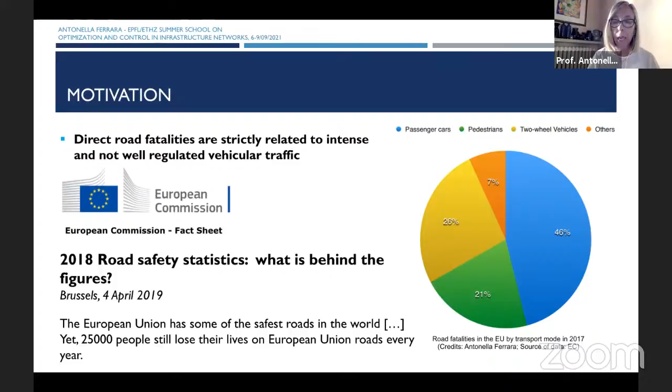Another aspect related to traffic is that congestion has an impact not only on pollution and climate, but a very strong impact on road fatalities. Consider that roads in the European Union are among the safer in the world, but in spite of that, every year we have 25,000 people losing their lives on the roads. This is the so-called direct fatalities, but we also have indirect fatalities related to air pollution. Looking at this picture from the World Health Organization webpage, you can see that transportation systems are considered the second source of fatalities in our industrialized world.

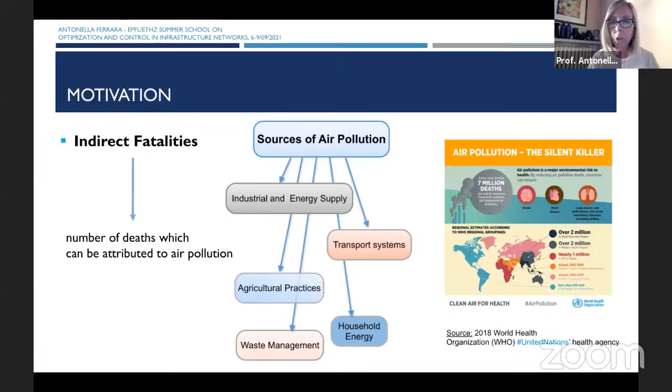So we have to do something. We have a mission, especially considering that people like me, as a control expert, have the possibility of making an action, having some impact on the system. So we have this mission to try to solve or alleviate the problems I've just mentioned.

Traffic control is a particular control system which can be recast into this classical scheme, the so-called closed loop control system. We have the road traffic system, seen as the process to control, upon which some exogenous signals have an impact. These exogenous signals are external inputs which are not manipulable. Then on the system we have actuators, devices which allow us to exert an action on the system, and sensors, devices which allow us to measure some quantities.

In case the quantity we're able to measure is, for instance, the density of traffic, we can assume some reference density - the density which, according to some prescription, is the prescribed density for any particular point of the traffic system. Then we can compute an error, and design a controller such that using the error as input, we can exert the correct action on the system.

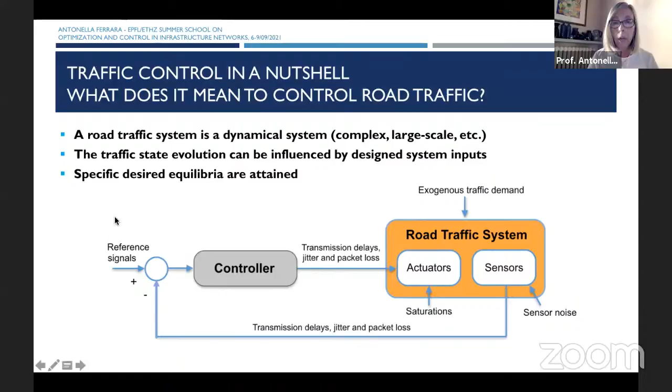The objectives typically used in traffic control may be several - I'll mention some that I'll use during the talk. For instance, the total time spent by vehicles in the road traffic networks, the maximization of the total traveled distance by vehicles in the network. Another possibility is to maximize the so-called capacity exploitation of the system, for instance selecting specific set points in order to make the system be exploited at the maximum of its possibility. As I said before, we started by making some comments about sustainability.

And of course, you can also have some control objectives which are strictly related to sustainability. Sustainability is related to emissions, safety, noise pollution. So we may want to reduce the noise. There's also the aspect related to energy efficiency, and environmental risk mitigation, for example, when dangerous goods are transported via freight.

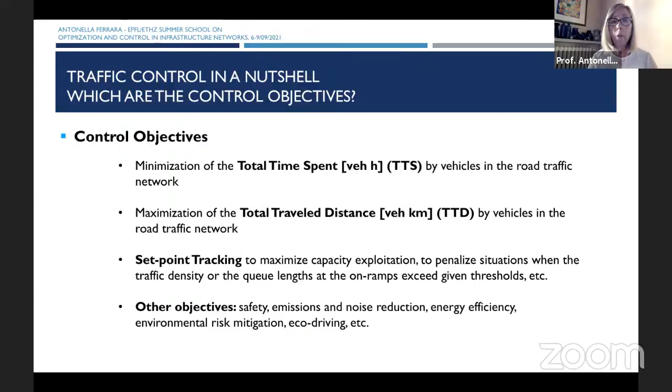So we can also decide to formulate a control problem, an optimization-based control problem in particular, in order to minimize the environmental risk, and so on. These are just examples. The idea, which is the basis of the second part of the talk, is...

related to the possible future scenarios we may have in traffic systems. I'm particularly thinking of freeway traffic systems, but what I'm going to tell you may be valid with some slight variations also for urban scenarios. So what is becoming more and more different, thinking of future years...

is that instead of having in our traffic system only human-driven vehicles or low automation, traditional vehicles, we will have more and more the presence of highly automated vehicles—not necessarily autonomous vehicles, but this is why I prefer to use the word automated. If the vehicles are autonomous, they can be even more efficient in terms of control or controllability of the traffic system.

But even if they are only highly automated—and when I think of highly automated, I'm just mentioning vehicles with on-board adaptive cruise control systems, some braking and traction control algorithms—this is something already in the market, already considered feasible, or already produced in some cases.

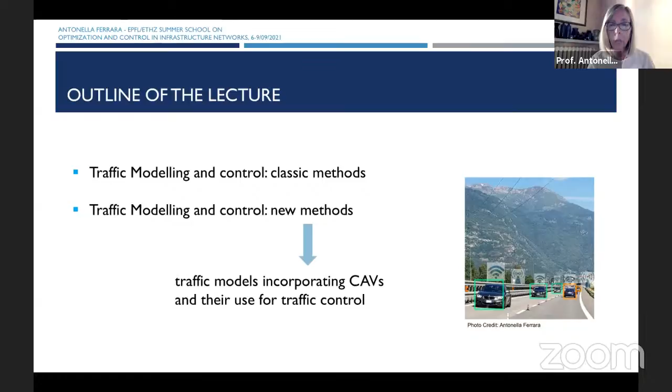Okay, so let's start from the classical methods and say a few words about, in particular, the models to be used first, and then some methods for controlling the system. When we design a control system for traffic systems, we have to follow the same procedure that we are familiar with.

I believe that the majority of you have a certain background in control, but the idea is that a control system, in a classical way to think of this concept, is designed on the basis of a model of the process. So it's the so-called model-based approach, and this is the classical, very classical approach also in traffic control. So there is the need to formulate a model of the system.

Considering traffic systems, the classical models used to describe traffic flow can be of different types. Typically we have microscopic models, mesoscopic models, and macroscopic models.

Microscopic models are models which describe the single vehicle as if it were a kind of agent moving in the network.

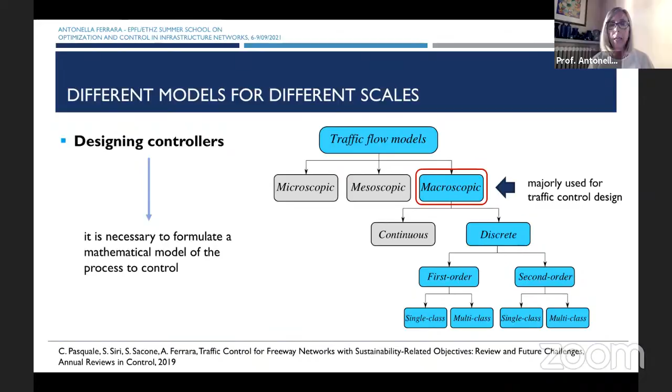And then very often we may find single-class models or multi-class models. When I say multi-class, I mean models in which different types of vehicles - like for instance cars and trucks, or kinds of vehicles like bikes or buses - are distinguished from the classical cars.

Just to give you a very brief review of the classical models, I'll mention a model that I believe some of my colleagues have already mentioned, which is the well-known Lighthill, Whitham, and Richards model.

This model, as you see in the slide, is described by a partial differential equation based on the density. Rho is the density of the traffic flow, t is time, x is space - so it's a kind of conservation equation, to call it by its name. It is based on this function f, the so-called traffic fundamental diagram, a diagram describing the theoretical relationship between the flow and density of the macroscopic traffic under steady state conditions.

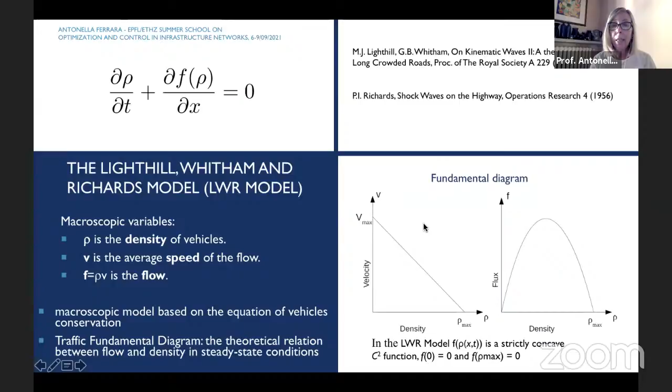This model was introduced in the 1950s, so we are talking about a very classical, very ancient model, at least from the perspective of young students. This model was anyway the basis upon which other models have been developed.

For instance, the very well-known cell transmission model, the so-called CTM, is a kind of discretization of the model we've seen before. The discretization is performed both in space - subdividing the freeway into a collection of cells - and in time.

For any cell into which you subdivide the freeway stretch you're dealing with, we have a first order equation describing the evolution of density in the cell. Rho sub i is the density inside cell number i, and here you see we have a flow entering the cell and a flow exiting.

If you look at the flow entering a cell, you can determine this flow simply on the basis of a very classical demand and supply mechanism - a mechanism which is very easy to explain.

You have a certain volume of vehicles which ask to enter cell number i, but cell number i already has a certain number of vehicles inside, characterized by a density. The capability of cell i to accommodate entering vehicles also has to be considered - the supply is exactly this capability of accepting new traffic entering the cell.

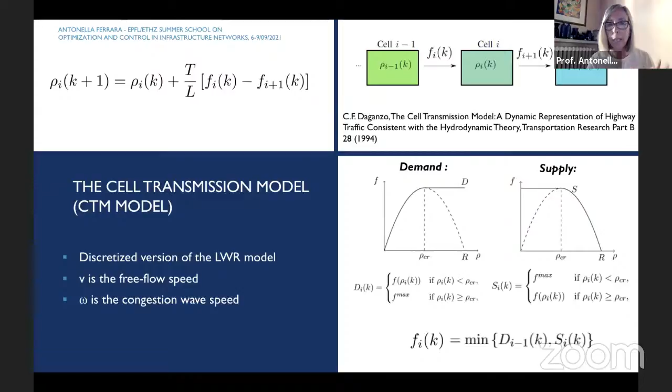The CTM, the cell transmission model, was originally described for a single stretch - a kind of tube, a linear piece of road.

But then there was another paper, still written by the author of the CTM, Daganzo, in which new cells were introduced - the so-called merge and diverge cells - which are the building blocks on which you can build an entire traffic network, modeling something close to a real-world traffic system. Of course it's a model, so it's an approximation, but it can be a good model of a traffic system.

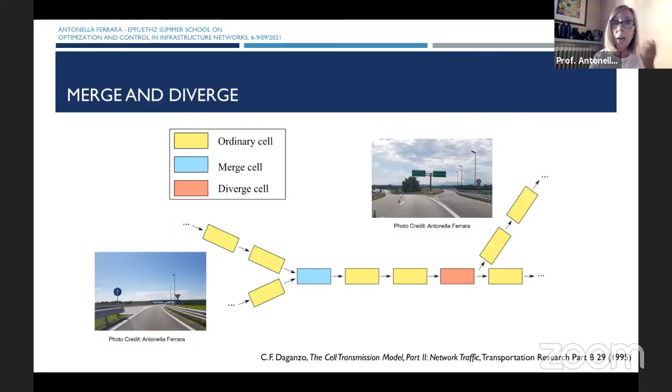Of course, there are slight differences, and one of the issues one has to consider when using the CTM is the difficulty, or the impossibility, of this model to be very precise in describing an effect present in real traffic: the capacity drop effect. This occurs when you have a congested cell, a bottleneck. If you look at the flow exiting that cell, the so-called discharge flow, it is typically lower than expected, lower than the capacity of the bottleneck. This flow reduction, observable in real systems, is typically around 5 up to 20%, so it's not negligible, to be precise.

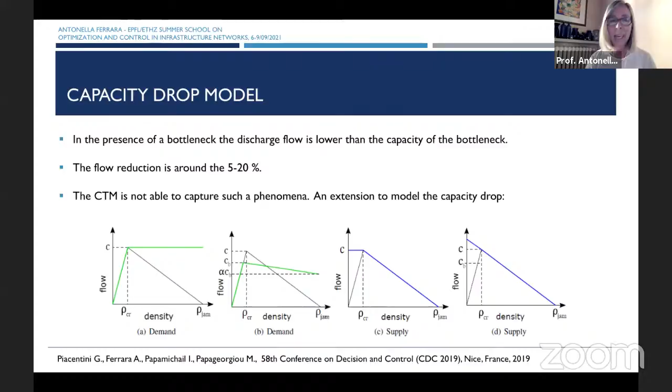Unfortunately, the classical CTM model cannot describe this effect. There are many variations to the basic CTM model proposed in order to accommodate or describe the capacity drop effect. One of these is presented in the paper indicated at the bottom of this slide, co-authored with Professor Papageorgiou, and also with colleagues of Professor Papageorgiou, the well-known name in traffic control Ioannis Papamichail, and my former PhD student Giulia Piacentini. This is something I will use again in the second part of the lecture, which is why I mentioned this paper.

Another model which can be useful, and rather convenient in terms of control design for its simplicity, is a model I proposed together with Professor Canudas de Wit, called the variable length cell transmission model. It's very simple in the sense that it is based on three differential equations only for a certain freeway stretch, describing the density in the two parts into which the freeway stretch considered is divided - for instance, we assume there is a congested part and a free, non-congested part.

So we have the density describing those two parts, and then we have the evolution of the length of the queue, which represents the shock wave, if you prefer a more technical term - the evolution of the congested part of the cell. If you think of a traffic network, you can identify portions with some free part and some congested part, and that portion becomes a stretch to be modeled in this way.

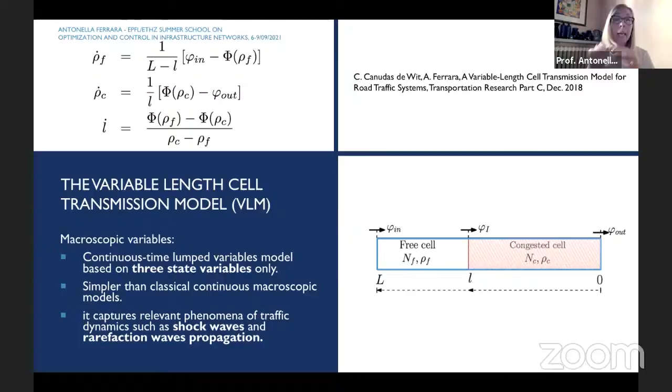Of course, there are other macroscopic models you may consider if interested in traffic control. There is the well-known asymmetric cell transmission model, proposed by Professor Horowitz and co-workers. There are many different multi-class versions of the CTM. And then there is the MetaNet model, which Professor Papageorgiou has already introduced, a second order model capable of describing the evolution of the density in any cell into which you may subdivide a traffic system, but also the velocity of traffic - and this incorporates the possibility of correctly describing the capacity drop effect I mentioned before.

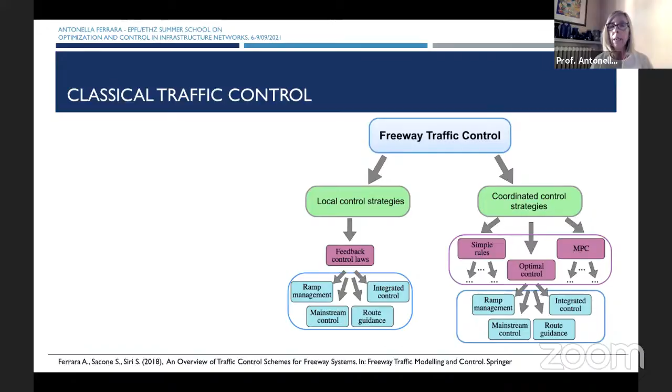Now let's say something about classical control. I focus, as I mentioned before, on freeway traffic control because it's something I know better, to be honest. This classical freeway traffic control can be subdivided into two parts: local strategies and coordinated control strategies. Local strategies typically consider a very local, small portion of the network, in which you have some kind of actuation - I'll say immediately what I mean by actuation in a classical traffic control system. In coordinated control strategy, you may have cooperation, combination, or coordination among different local control systems.

I'll mention the traffic control systems and actuation mechanisms for implementing this kind of control. The more classical one is the so-called ramp metering, where you have traffic lights on the on-ramps of the traffic system, so you can meter and control the entrance of vehicles into the system. Another very classical traffic control methodology is the use of variable speed limits.

So you have velocity limits on any lane typically of the traffic systems, and you may change the signals in order to slow down or let the traffic move at a certain speed, and this can create some regularization of the traffic itself. And finally, you may have dynamic routing, which means that, for instance, you can make some category of vehicles, for instance trucks, select an alternative direction, making the main traffic system, the mainstream you are controlling, less congested.

These kinds of techniques are typically also used in combination, in a kind of integrated way, in coordinated control strategies, which may be, as is traditionally true, based on optimization. And very often they also include some prediction capability, typically designing the control strategies using model predictive control.

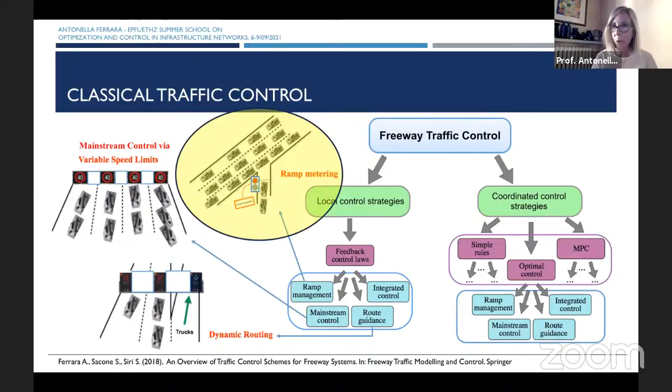I want to give you some examples of these methodologies, and I will focus in particular on ramp metering. Also considering the topic of this summer school, I wanted to give an emphasis on optimization-based technique, so I start immediately considering model predictive control.

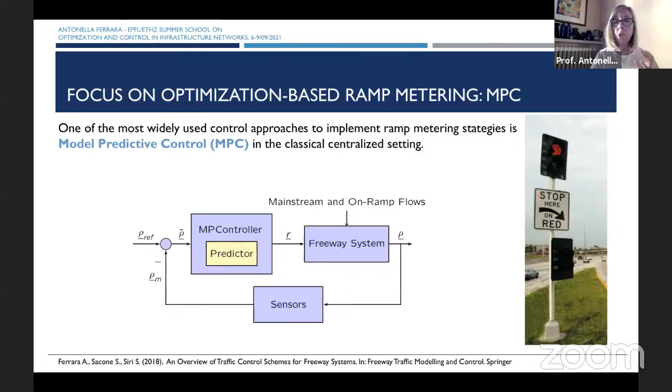Of course, you can immediately understand that the complexity of the model we decide to use as a predictor will have an impact also on the computation time and on the accuracy of the computation, and also on the decision, for instance, to implement the MPC in a centralized way or in a decentralized or distributed way.

So let me say that in general, when we use an MPC or optimization-based ramp metering controlling a traffic system, we have some advantages considering the control objectives that I've already mentioned before: the minimization of the total time spent in the system, the maximization of the total travel distance, the tracking of set point values, or any other kind of objectives, such as those related to sustainability, as we mentioned before. And you have the advantage of having some prediction incorporated in the system.

You may have the advantage of having some optimality, or let's say suboptimality, but with acceptable difference with respect to the optimal solution. You may have compliance with the constraints, which comes directly from using MPC. But the drawbacks in a real system are that typically, in terms of computational load, the MPC algorithms are demanding, and they are difficult to apply in a real system, especially if it's large scale.

And so if you want to implement it in a centralized way and you have a complex and large traffic network, you may encounter some difficulties.

So in particular, if you want to have an idea of what I did in the past with my colleagues to tackle this problem—the computational complexity and the difficulties in implementing classical MPC approaches for traffic control—you can see what is presented in this slide, in which I've tried to provide a schematic of what can be done to make MPC-based ramp metering control schemes actually usable in a real system.

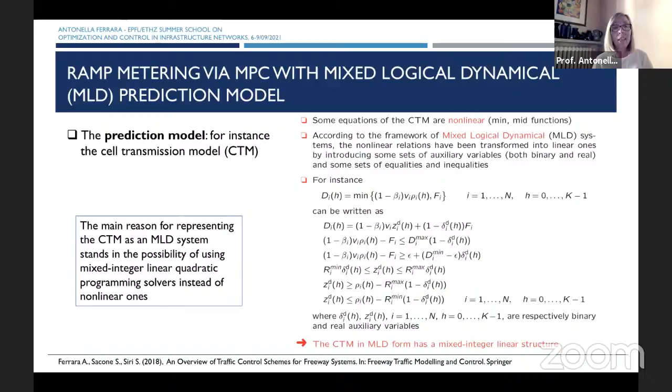This, of course, is beneficial in the sense that when you solve the optimization problem, you can use mixed integer linear or quadratic programming solvers, for instance, a solver which is easier to use, and the problem itself becomes in some sense easier to solve.

I give you an idea of the problem. So you may have, let's say, the initial condition for the density and the length of the queues on the on-ramps. You may have the demand and the supply as known quantities, and what you have to determine is the so-called metering flow, so the flow exiting the on-ramps and being allowed to enter a certain cell. And to do this, what is solved is a classical finite horizon optimal control problem.

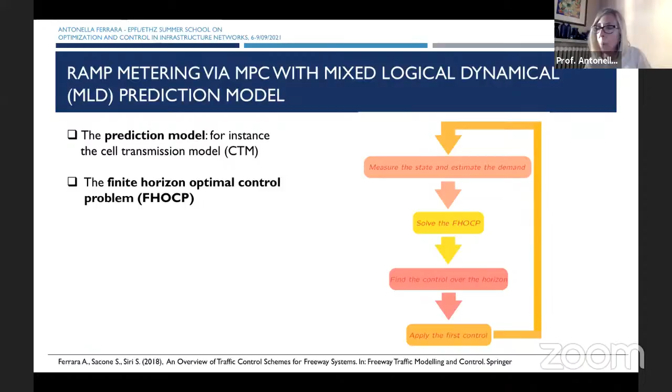I show you the schematic, and if you agree, we can stop here for a moment.

Is it correct? Kimia, it's almost time to stop, to make a break, or? Well, you can decide as you wish. We can either have a quick break right now, or if you like, you can continue. As you prefer. If the students need a break, I stop. Otherwise, for me, I don't need a break, so I can also go on if you prefer, and maybe finish a bit earlier. Is it fine? Yeah, sure, of course. Okay, very good, very good. So if they agree, I hope they're not too... So for me, the break is not needed actually.

Okay, so as I said, the solution of the problem is based on the classical approach that probably you know very well. So we measure the state and estimate the demand. We solve the finite horizon optimal control problem, find the control over the horizon that we have decided to use, apply the first component of the control sequence that we determine, and go on again and repeat the procedure.

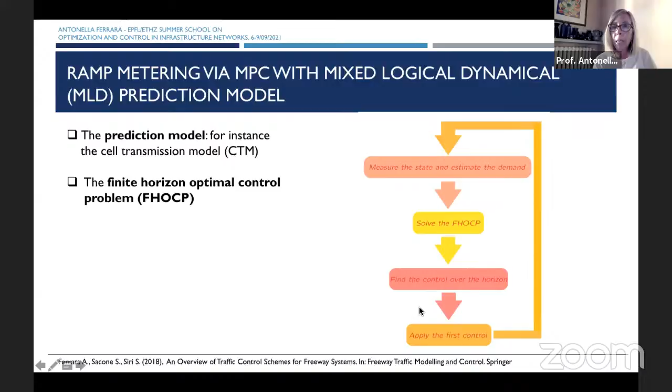The problem, of course, is different depending on the kind of cost function we decide to use. I'll show you an example of what happens if we use a mixed logical dynamical predictor to solve one of the classical control problems for a traffic system. For instance, if we use the so-called total time spent, and we want to minimize the total time spent by vehicles in the traffic system, the cost function may depend on the density and on the length of the queues on the on-ramps. The optimization problem we have to solve, in a finite horizon fashion, is a mixed integer linear problem.

If instead we want to minimize the so-called quadratic deviation of the state variables - again, the density and the length of the queues on the on-ramps - with respect to some pre-specified thresholds or set points, the problem becomes mixed integer quadratic, as I said before. And of course, there are other possibilities.

In some of my papers you may find the cost function I've reported here. In this case, the idea was to minimize the cases in which the state variable exceeds given thresholds, which can be set considering the particular traffic system you're dealing with. Another case is when you want to minimize the number of cells which are congested, so in some sense reduce the diffusion of congestion in the traffic system.

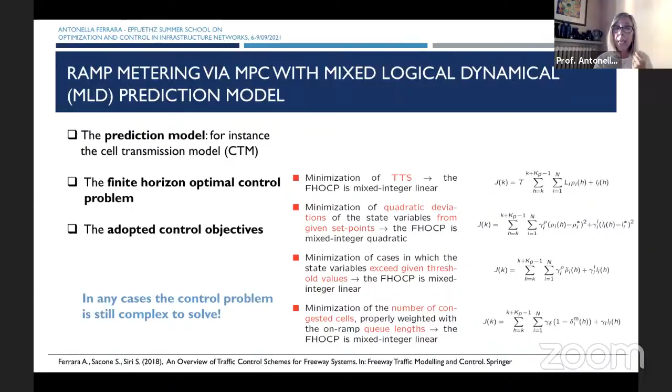In both of these cases, the problem to solve is mixed integer linear. So reformulating the model in mixed logical dynamical form is a way to reduce the complexity of the optimization problem to solve. But in any case, the problem is still complex.

So the other possibility that I mentioned in the list I showed before is to control the traffic system only when it is actually needed. This means adopting a kind of philosophy called the event-triggered control approach. The schematic is the one reported in the slide.

We again consider having the traffic system, we measure the state - in case of the CTM, this can be the density in any cell and the length of the queues on the on-ramps. We estimate the exogenous signal, the demand, which, as I said before, is something unknown. We solve the optimization problem, find the control over the horizon we decided to adopt for the optimization, apply the control action - the first component of the sequence - and then check the triggering rule.

The triggering rule is something which may tell us if some change has occurred in the traffic system dynamics, in the traffic system evolution. If, checking the density and the length of the queues on the on-ramps, we see there is no major difference with respect to the previous time instant in which the optimization problem was solved, we can keep on using the same control sequence we computed before. So there is no need to solve the optimization problem again. And this is exactly the idea.

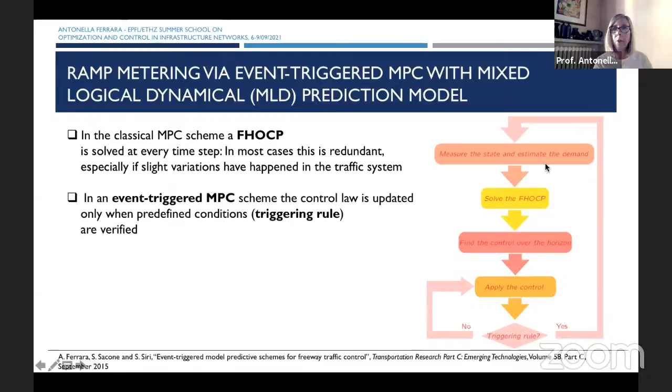Instead, if something new happens in the system - for instance, an abrupt change of the demand, which means the density in the system, not immediately but rather quickly, undergoes a variation - well, you have to re-optimize. You have to solve the optimization problem again, and in this case you go back and repeat the procedure. So this is the idea.

The triggering rule is more or less what I said before - I just reported an example of a triggering rule. If you think of the MLD, the mixed logical dynamical setting of the model, this variable, which I didn't mention before, is one of the logic variables we use to indicate whether the system is congested or not. So if the system is congested, typically this variable becomes 1, otherwise it's 0.

So what we do, for instance, to propose a triggering rule or to implement an event-triggered control approach, we check this logic variable. So if the mode of the system, congested or not, is not different from the one we can retrieve from the prediction model, and if the density we can measure is not different from the one we can retrieve from the prediction model, considering the measurement at the previous triggering instance, and if the length on the on-ramps is not much different from the predicted length, considering the measurement transmitted at the previous triggering event, then we can keep on using the already computed control action.

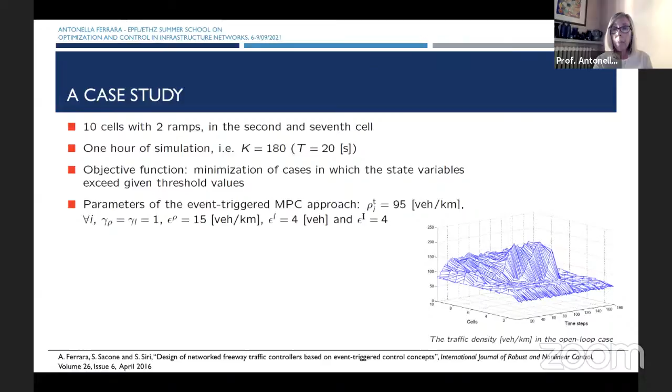Well, if you look at the result, you can see the improvement of the total time spent is 7%. You may say this is not a very huge increment, but probably you have already heard in other lectures—I believe Professor Papageorgiou already mentioned this—that typically in traffic control the improvement you may obtain is not so high. And when you find papers showing improvements in total time spent like 68%, 70%, 50%, be careful. It's strange. It's very difficult to manage with ramp metering control to obtain such a significant increment.

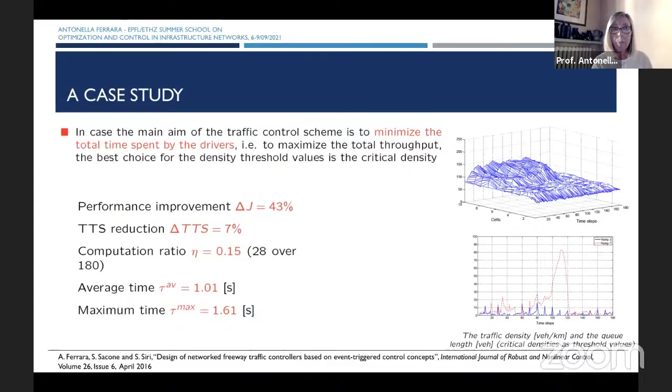Well, of course, using event-triggered control—this is something I have to tell you to be complete in my description—event-triggered MPC control implies a number of issues that need to be tackled from the theoretical point of view. The optimization problem is solved whenever the triggering rule is verified, that is, when the triggering rule tells us we have to resolve the optimization problem. And of course this means we are solving the MPC problem in an asynchronous way, which means very particular convergence and feasibility aspects need to be faced.

The second aspect I want to mention is stability results. When you work with traffic control systems, it's always an issue to consider which stability properties you may prove, and this is not so easy to discuss in general. If you look at my papers, very often we talk about input-to-state stability, input-to-state practical stability, input-to-state regional stability. So let me say that any time you deal with this kind of system, you have to be rather careful in claiming a very utopian result, like global asymptotic uniform stability. I'm always very surprised when I see something like that.

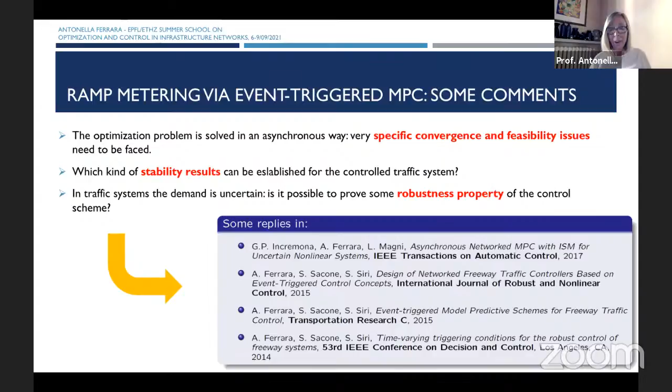Okay, I'll go quickly now because I want to move to the second part of the lecture. As I said, I still have to tell you a few words about the other approach that can be used. To summarize briefly, if you remember, I said that to make an optimization-based control approach applicable in a real traffic system, you have different possibilities. You may reformulate the model so that the optimization problem becomes simpler.

The second way is to control only when it is actually needed. So observe the traffic system and identify the time instant when you need to solve the optimization problem—the event-triggered approach is a good solution for this.

The other possibility is to control the system only where it is actually needed. This can be implemented by subdividing the network. I've just reported a stretch, but this can be extended to a more complex case in which you have a network with intersections, merge and diverge elements, and you subdivide the network into clusters.

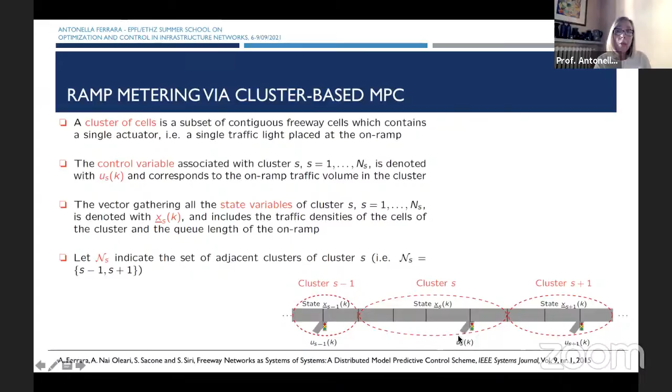What we did in the past was to consider a portion of the freeway system and a collection of contiguous clusters. In this way we created a kind of state vector for each cluster. The idea used to identify and create a cluster is that within the cluster itself there is a single actuator. In the case of ramp metering, a single actuator means a single on-ramp.

If you look at the literature, there are different solutions for cluster-based traffic control. One possibility is to use decentralized MPC: for each cluster you solve an optimization-based control problem as if that cluster were an isolated system, with no connection to the other clusters present in the traffic system. Another possibility is to use distributed control.

There are many different solutions you may find in the literature. I can't claim this is the best, but as an example, a possible solution is the one presented in the paper indicated at the bottom of the slide. In this paper we presented two different algorithms. The first, algorithm one, is called the partially connected, non-iterative independent algorithm.

In this algorithm, the local controller of each cluster solves its own optimization problem, minimizing a local cost function. This cost function depends on the state of the cells in the cluster and on the input signal used to control the flow of vehicles exiting the on-ramps and entering the mainstream. This optimization problem produces the control sequence for the cluster itself.

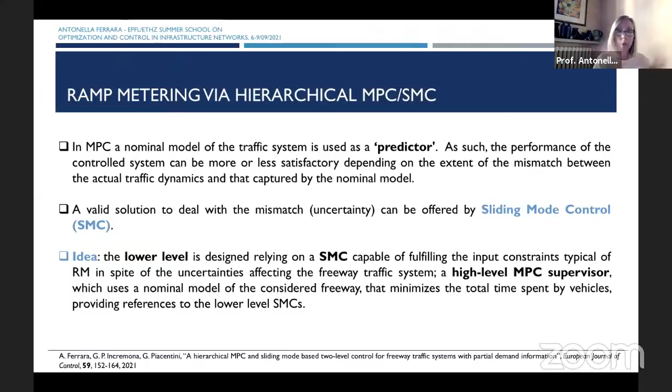And now I can conclude completely this first part, showing you the scheme that I mentioned before.

So if you want to incorporate also a robust control algorithm together with MPC, a possibility is the one that, for instance, we have presented in the paper that you see here in the slide, at the bottom, in which we have decided to use sliding mode control at the level of the local loop for any cell of the system, and an MPC as a kind of high-level controller.

In this case, I just want to add some comments to the scheme, and then you may find the details in the paper. The MPC control is a supervisor in the sense that it is based on a prediction model of this traffic system, one of the models that we have mentioned before.

It can be the CTM, it can be the MetaNet. In this paper, we have used the MetaNet model in particular. And what is done is to produce a reference for the state of any cell of the system.

A sliding variable is computed locally at the level of the local controller of the cell, measuring the state of the cell itself. Let's look at cell number i for generality, measuring the state of any cell and comparing it with the reference state provided by the high-level controller.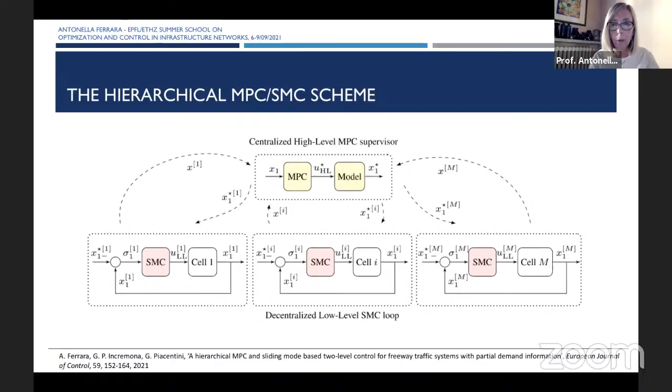This is all I wanted to tell on the first part. Now let me just move to the second part. I'll go very quickly because I added some detail, but I think it's better to skip them, and you can find them in the paper. Let's move to the more modern control approaches, as I call them.

As I said, the introduction of connected and automated vehicles in traffic systems can be regarded as a kind of paradigm shift, in the sense that now, instead of having the need of using infrastructure-based control, think of what we have seen before. A ramp metering control uses a traffic light, which is an infrastructure-based actuator, to perform an action on the system.

Now, the idea is, instead of using infrastructure-based devices and approaches to control the traffic system, to use the vehicles, or some vehicles, which are included in the traffic system itself. In particular, the idea is to use the so-called connected and automated vehicles, the CAVs that I mentioned before, to create a kind of artificial moving bottlenecks.

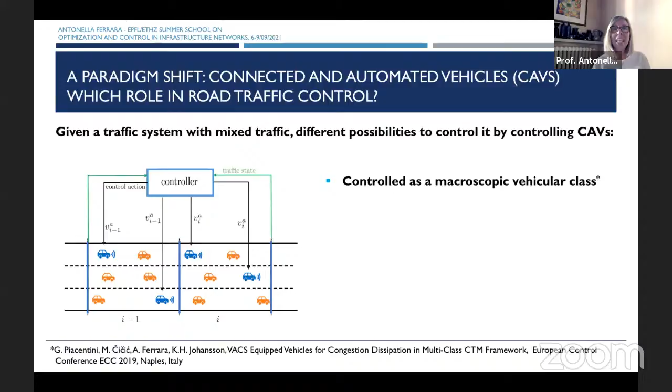If we want to use connected vehicles as actuators, one possibility is to control the connected and automated vehicles present in the traffic system as if they were a macroscopic vehicular class. This is done in a paper co-authored with Professor Karl Henrik Johansson, whom you saw this morning.

The idea is to use a model where we subdivide the traffic system into cells. For any cell, we have a description of the density of one class of vehicles, for instance the classical human-driven vehicles, and another class, the density of connected and automated vehicles. With both classes modeled, we need to account for the interference, or the way the two classes behave together. Since we assume the possibility to control the velocity of connected and automated vehicles, we can create a regularizing effect on the overall traffic system.

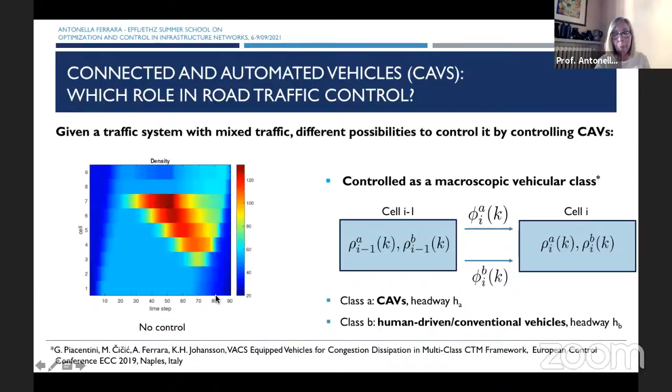What happens in this picture is that we have congestion starting from this cell at a certain time instant, then propagating backwards into the upstream cells in space, and forward in time. If we model the connected and automated vehicles as a particular vehicle class, we get different control effects depending on the penetration rate—the fraction of connected and automated vehicles over the total vehicles present. As shown in the paper, increasing the penetration rate up to a certain extent produces effects that become roughly constant after a certain level, but the effect is good: the congestion tends to be alleviated and the density becomes lower compared to the open loop case.

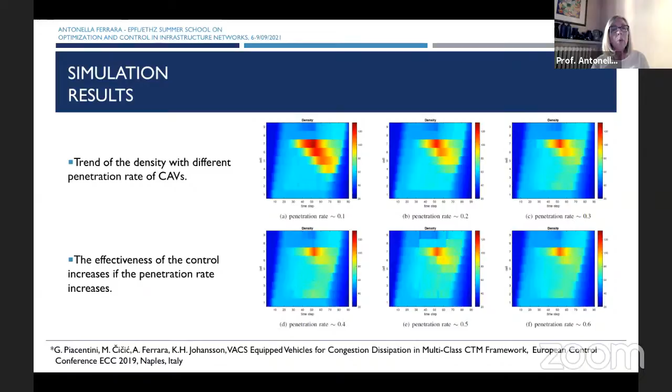So one possibility is controlling connected and automated vehicles as a single class, with human-driven vehicles as another class. Another possibility is to control connected and automated vehicles individually, assuming a controller for any vehicle. This is easy to implement technologically, but the control is not easy to design, since we must balance the selfish behavior typically caused by this setting against the social optimum we want to reach.

An idea is to use a game theory-based approach in which vehicles are individual agents playing a game. There's no inherent cooperation, but we may want to realize a kind of cooperative game even though the setting is typically non-cooperative. This cooperation can be enforced using the connectivity we have—the possibility of exchanging messages among the vehicles, which are our actuators.

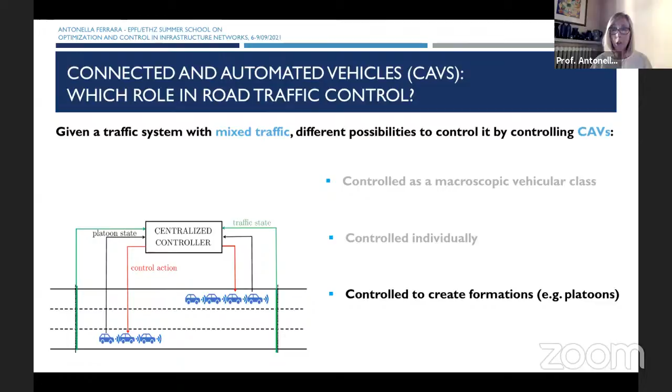Another possibility is to create formations such as platoons. You may decide to control the platoons in a centralized way, assuming a single centralized controller with information on the entire network and all platoons moving on it—this can be computationally demanding and also demanding in terms of measurement transmissions. Another possibility is to use local controllers for any platoon. Again, the game theory-based approach can be transferred to this case, and some form of cooperation exploiting the vehicles' communication capability must be enforced.

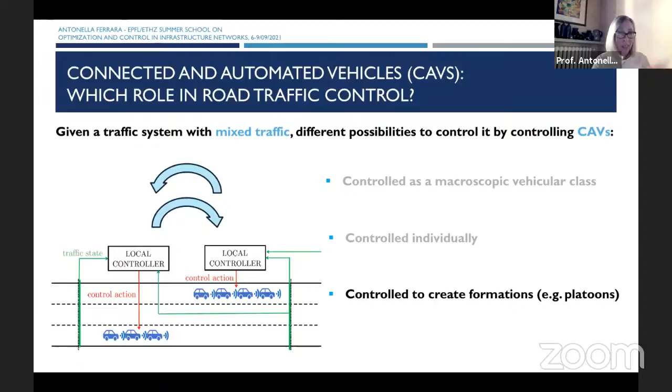And this is exactly what the arrows indicate, what I just said. Well, a comment on the model.

Depending on the approach you decide to adopt, remember what I said before: CAVs controlled as a macroscopic vehicular class, CAVs controlled individually, or CAVs controlled to create platoons or other formations. Depending on the approach one decides to use, you need to formulate a different model. If you decide to control the vehicles as a macroscopic vehicular class, varying the headways of this class or the velocities of these vehicles as a class, not individually, you need to use a single scale model. That is a model in which both the class of human-driven vehicles and the class of connected and automated vehicles are represented at a macroscopic level.

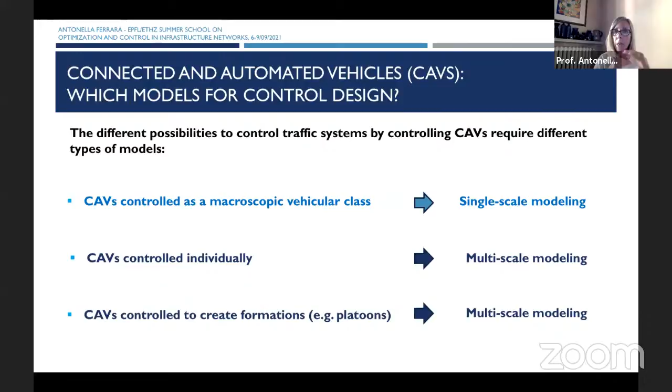But if you decide on the other two approaches, to control the connected and automated vehicles individually, or to create formations, the modeling approach must be completely different. It must be multi-scale, because at the same time you have to describe the evolution of the connected and automated vehicles, which are individual vehicles, kind of single agents. They are microscopic vehicles immersed in a macroscopic flow. So you have two scales at the same time, and they coexist, and must be described mathematically at the same time, incorporated in the same model.

This picture wants to describe, in a pictorial way, what I've just told you. So the idea is that if we want to design a control system for a traffic system using this new vision, controlling the system using connected and automated vehicles which are themselves part of the system, we need a completely different modeling approach.

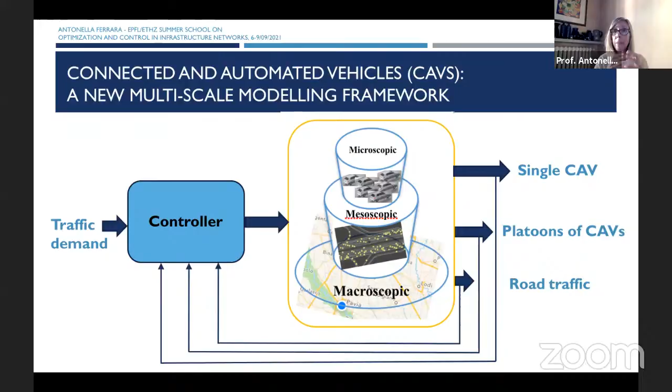We need a model which includes at the same time, in the same formulation, the macroscopic traffic to describe the entire road traffic system. We need a microscopic level to describe the single connected and automated vehicle. And if we want to enforce the creation of platoons or formations, we also need a mesoscopic level where car-following effects are visible and described.

And well, this is the novelty in some sense. What I'm going to tell you in the last part of the lecture is something about what we have done using these different approaches, and in particular using multi-scale models.

I start with the CTM, the cell transmission model that we already considered before, where the traffic system is subdivided into cells. Now the difference compared to the first part of the lecture is that we assume, apart from the macroscopic traffic, the presence of some connected and automated vehicles. They may be individual or they may be platoons. I'll assume they are platoons, but the formulation remains similar—you only need to consider different effects for a single vehicle versus a formation of vehicles, since there is a different reduction of capacity performed in the two situations.

So a possibility is to incorporate the presence of platoons, very often called moving bottlenecks, in the traffic system. In the CTM, for any cell we have a first order equation describing the density. The presence of platoons can be described by introducing the variable o with index j, which describes the so-called occupancy of the platoon, with the index indicating the platoon number—1, 2, 3, up to a certain number, capital J. And this delta is a variable which indicates the presence of the platoon in a cell.

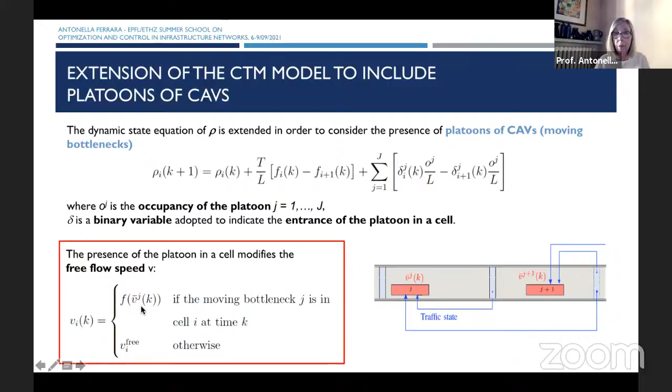When we have this moving bottleneck, the classical free velocity of the macroscopic traffic may be reduced, in the sense that the platoon exerts an action, as we have said, it reduces the capacity of the cell itself. If you look at this picture, you can imagine having 2 or 3 lanes, and one lane becomes partially occupied by the platoon itself. So typically the velocity in case of presence of the platoon in a certain cell is a function of the velocity of the platoon itself. This is a way to describe the platoon.

This is the way we adopted in the paper I mentioned before. For instance, in that case, we designed a kind of centralized control in which we use as a control variable the speed of the platoons present in the traffic system. So what we do in practice is solve an optimization problem in which we find the optimal control sequence, and in particular the control variable is the speed of the platoons in the traffic system. The optimal velocities that any platoon has to maintain is computed by solving an MPC control problem, in which we minimize the so-called total travel time, as you have seen before.

We also minimize the displacement of the difference between the density at the bottleneck location with respect to the so-called critical density. This is what is normally done, considering that at the critical density, the capacity of the road, the flow that a certain cell can accommodate, is the maximum flow. So it's quite typical to introduce a term to maintain the density as close as possible to the critical density, avoiding entering the congestion phase.

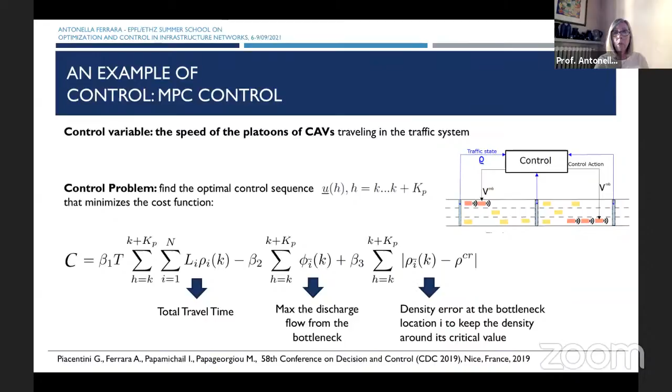Apart from the cost function, which is just an example, you may also use platoons of connected vehicles with different cost functions. But just to give you an idea of the possible results, I used this cost function and propose some simulation results obtained using a stretch of road with 16 cells, each cell having a length of 500 meters.

What is done is we create a kind of temporary physical bottleneck, something which is not moving, differently from the platoons, which are moving bottlenecks. This temporary physical bottleneck is placed in cell number 13 — I mention the number because in the picture it's useful to remember its position. This physical bottleneck has an effect in terms of reduction of capacity, and it remains in the system until a certain simulation time, after which the total capacity is restored and the physical bottleneck is removed.

Just to give a real world example similar to this scenario: when you have an accident, it creates a loss of capacity, and then after a certain time the accident is solved and the total capacity of the infrastructure is restored.

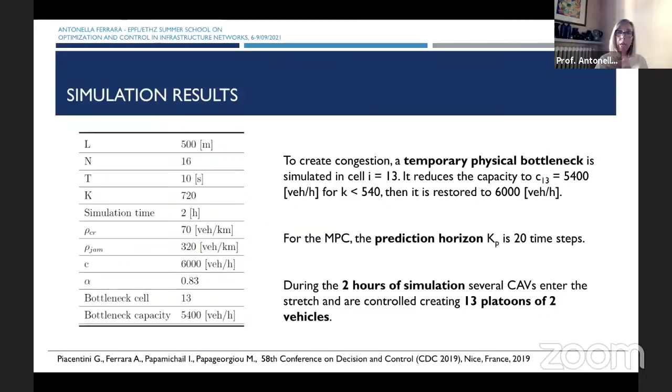What is done in this simulation is to observe 2 hours of simulation, assuming several connected and automated vehicles enter the stretch, creating 13 platoons of 2 vehicles each. This is the result.

Let me show you the result. This is what you obtain with the CTM, simulating the system I just described with the cell transmission model, without the capacity drop modification mentioned in the first part of the lecture. I show you this picture because it will be useful. If you look at it, the CTM without the capacity drop modification is not very realistic. You have a physical bottleneck at cell number 13, and some congestion is created in the cell before it, in cell 12, but this only propagates in time — there's no backward propagation of the shock waves, which is not very realistic.

If I use the CTM with the capacity drop effect, look at the situation — this is more realistic. I have the physical bottleneck, I have the congestion.

It is, of course, majorly present in the cell before the one in which I have the bottleneck, but the congestion propagates also backwards in the upstream cells, as is natural. So this is the realistic situation.

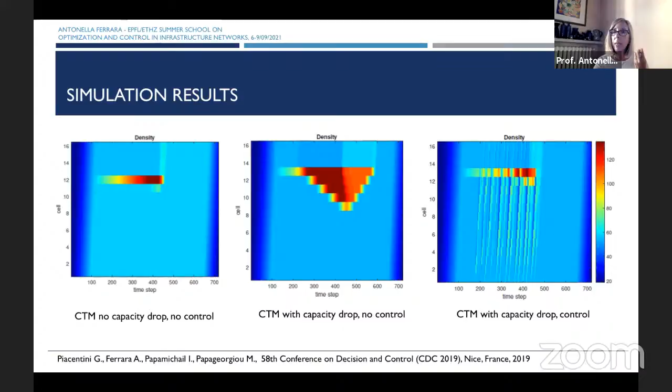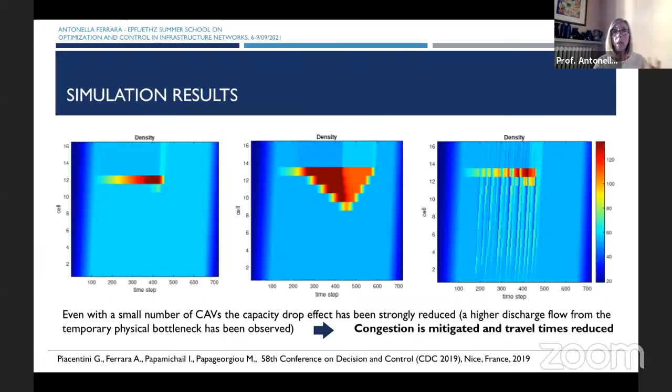This is exactly what we want to obtain with the control: reduce the capacity drop effect, reduce the back propagation of congestion, reduce the shock waves affecting the traffic system. So the idea of using connected and automated vehicles can be effective. Congestion is mitigated, and this has a beneficial effect on travel time reduction and emission reduction. Don't forget that reducing congestion also has a beneficial effect on emissions, fuel consumption, and so on.

Well, this was an example of how to use the CTM with a slight modification to incorporate connected and automated vehicles. Another, more complex way to deal with connected and automated vehicles is coupling a continuous model, a PDE-based model, with a model describing the dynamics of individual cars, the individual connected and automated vehicles, described by ODEs. So what we proposed at the end is a PDE-ODE model for the multi-scale description of the traffic system.

I want to briefly give you an idea of what I mean by this title. This model was actually proposed by my collaborators, two people I like so much to work with, Maria Laura Delle Monache and Paola Goatin. They proposed a model with a PDE model - probably you remember the LWR model we saw at the beginning of my talk, which described macroscopic traffic flow, a classical conservation equation - and then a constraint on the flow describing the moving bottleneck position, which is a kind of constraint on the capacity.

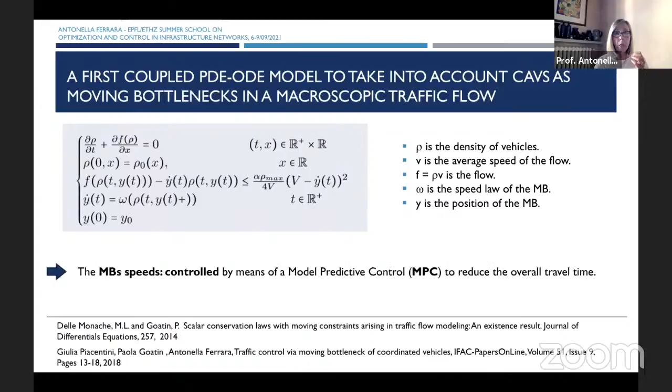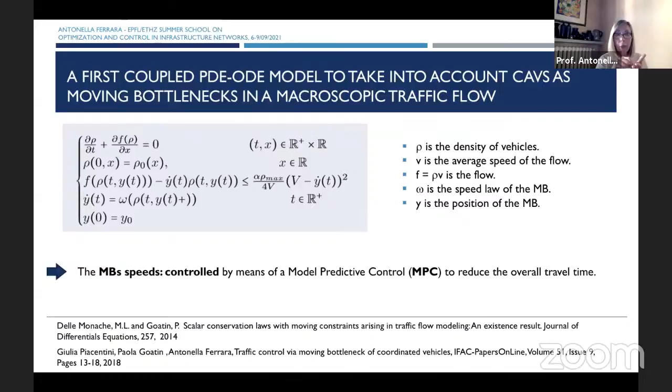This model was already present in the literature when I decided to face the problem using this approach. I found this model and decided to use it, and started to collaborate with Maria Laura and Paola. In particular with Paola, we immediately wrote a paper together solving a control problem using this model. As I noted in the paper referenced here, we solved an MPC problem to reduce the overall travel time of the entire traffic system by varying the velocity of the connected and automated vehicle - acting on the overall system by varying the velocity of the moving bottleneck.

But apart from that, we observed that the model, which was already there, wasn't enough to describe the formation, and in particular the platoons, of connected and automated vehicles. So we decided to work on the model again. Together with Paola Goatin and my former PhD student Giulia Piacentini, we further modified the model to incorporate the presence of platoons. If you think of a platoon moving along a traffic system, a piece of road or stretch of road, the platoon is characterized by the position and velocity of the front end and the position and velocity of the back end.

You can assume to have some low-level control of the platoon itself to have a constant, or let's say what is more constant in time typically, an headway which depends, which is correct considering the velocity of the following vehicle. So the headway between two vehicles typically depends on the velocity of the vehicle which is the follower. Apart from the low-level control, which for this presentation is not so important, we assume that a low-level control to maintain the platoon is present.

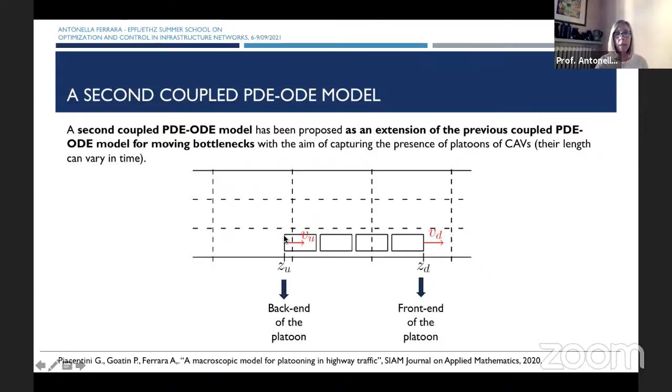I go back to the model. This is the downstream point and this is the upstream point of the platoon. The velocity of those two points of the platoon are described by means of these two ODEs. If you compute the difference between the two velocities and integrate this quantity, you can get the length of the platoon. This is positive for the control, because we can use the velocity of the platoon itself, assuming there is a low-level control maintaining the velocities of all vehicles at a given velocity, but we can also use the length of the platoon. So we have more flexibility in the control. That's the idea.

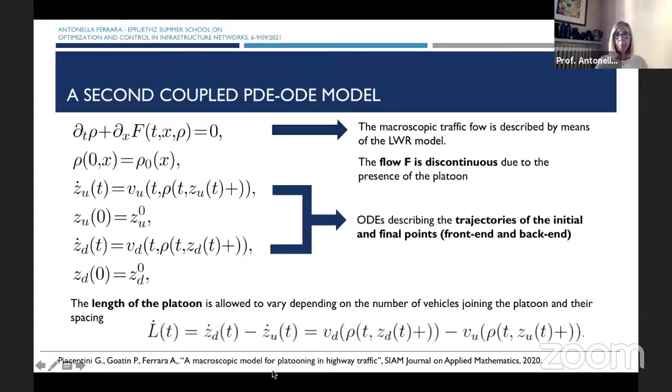This new model was presented in the paper reported here, and it has an interesting feature: the fundamental diagram is now discontinuous. So when the platoon is present or enters a cell, there is a kind of jump, because the reduction of the capacity, as we said before, creates a reduction of the capacity, and this reduction is moving along the road and depends on the velocity of the platoon itself.

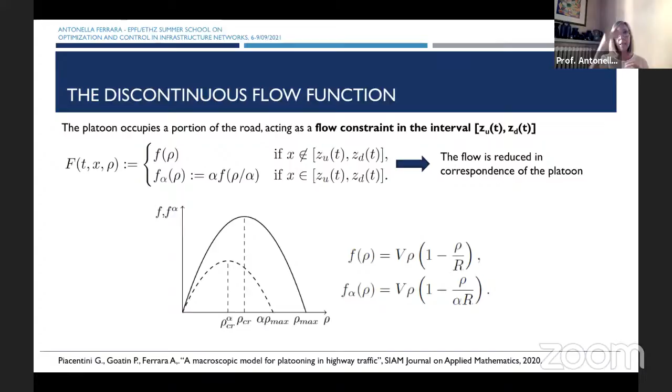What happens is that if you think of the traffic flow as a continuous system, the conservation equation which describes the density in time and space, you have an effect on the density mainly due to the motion of this platoon along the road, and a kind of jump sometimes when the platoon enters a cell, you get a jump of the fundamental diagram. This is due to this jump in the incoming demand and the corresponding jump in the supply that a cell can offer when the platoon is present.

Just to give you an idea: if the platoon is not in a certain position, so if the point in space is not inside the platoon, we have the classical fundamental diagram. But when the point in space you're dealing with is inside the platoon, if we look at the system as continuous, in the point you are looking at you have a reduced traffic fundamental diagram, due to the corresponding reduction of demand and supply.

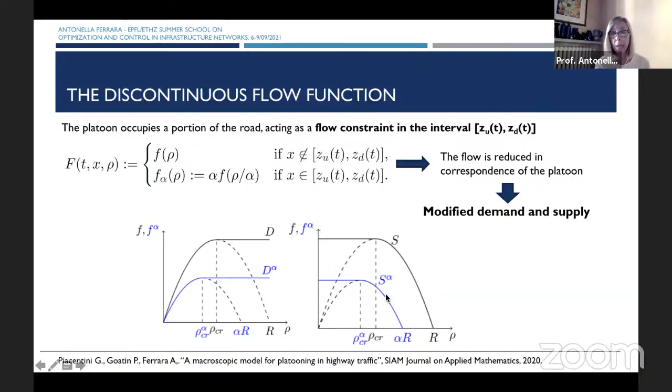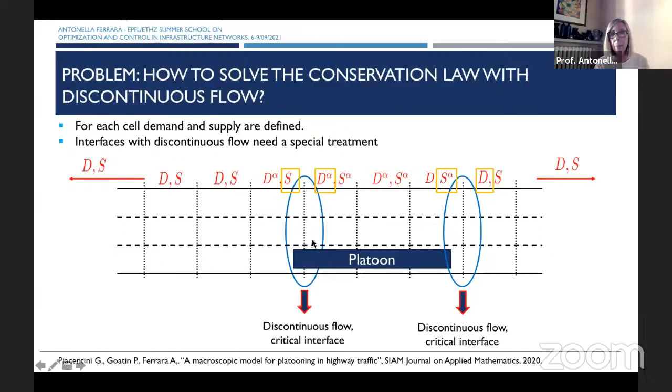This fact has to be dealt with, and this was the critical technical aspect to deal with. We had to invent a way to deal with this jump in the traffic fundamental diagram. I don't want to go too much into the details, I want to leave some time for real questions, but consider that, just to give an example...

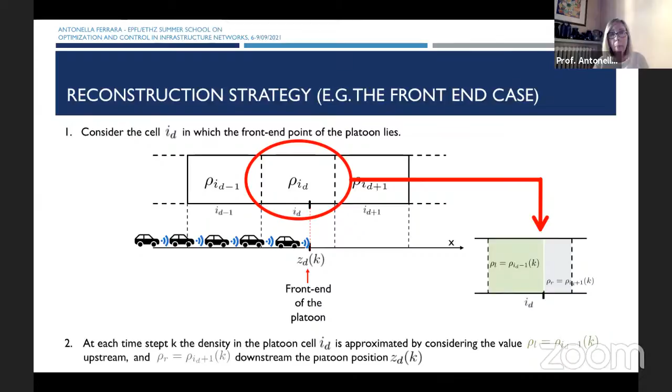If you look at the front end case, what we had to do is find a way to be explicit about the fact that when we have this front, we have a kind of jump in the density. What we have done, just to give a hint, is to approximate the density at the left part of the jump, the platoon front, with the density in the cell before the one we are dealing with, and the density after the front with the density in the cell which the platoon has to enter after some time. Considering this approximation, we can formulate a Riemann problem.

Of course, this is a very classical mathematical problem. What you need to do is simply apply, or design, a kind of numerical approach, a numerical method to deal with these kinds of shocks, which are called non-classical shocks.

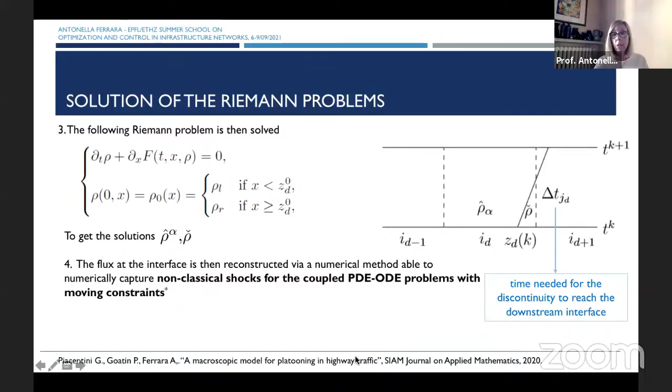And these kinds of waves are propagated along the traffic network. I'm trying to describe in a very simple way these phenomena, which are not simple at all, but it's nice to know that this model works pretty well.

This model was also used to solve a control problem, and this is what you can find in this other paper that I've indicated for your convenience. The idea, as I mentioned before, is to use both the speed and the length of the platoon, and this is done.

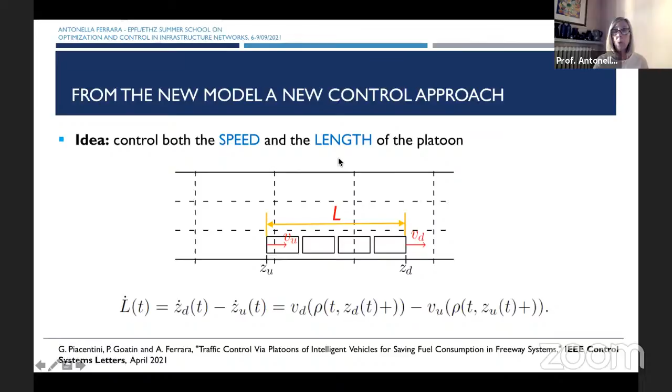In particular, in this paper, we have used as a cost function, a function which describes the so-called total fuel consumption of the traffic system. This total fuel consumption is written in terms of the density, and this is the optimization problem that we have solved.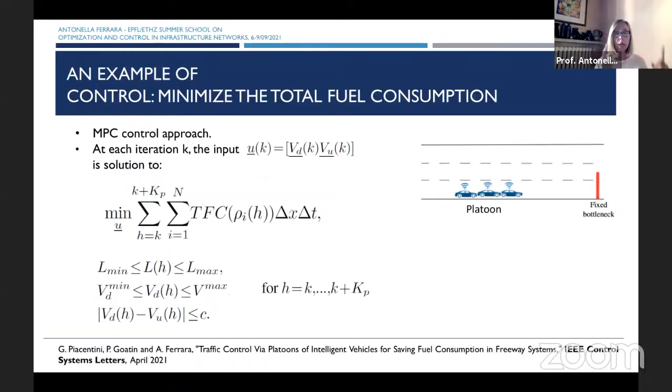There is a constraint for the length of the platoon, a constraint for the velocity of the downstream part of the platoon, and a constraint on the difference between the upstream and downstream velocity. The problem was solved, and this is just the behavior of the total fuel consumption model, but I want to show you instead the result in simulation.

We have a case in which we have 200 cells, so a road, a fixed bottleneck at the end of the road, and a certain arriving demand, which is rather high for half of the simulation, and then it tends to become zero, as you can see here. The output of the road is reduced by half by this kind of fixed bottleneck that we have.

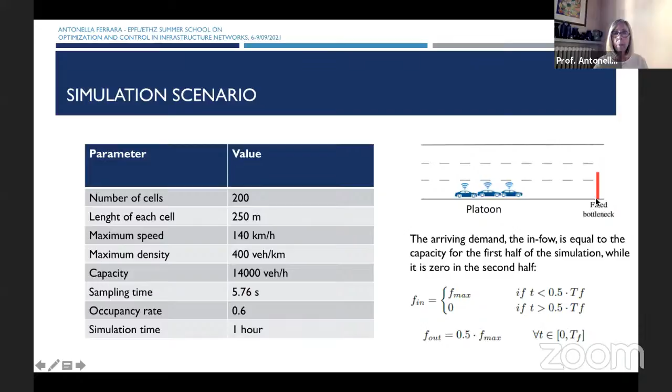This is the case in which we don't have the control, so the open loop case. This is the density increment. Yellow means high density, so this is the congestion produced by the physical bottleneck, which is placed at the 50th kilometer, at the end of this road stretch.

And this is the effect that we obtain with the platoon. The 2 lines that you see are the upstream and downstream part of the platoon. You see that the length is varying, probably you can observe it, and the density here is reduced, so the congestion is reduced.

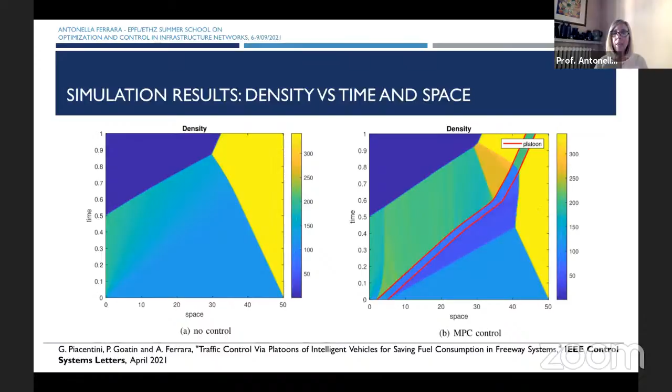What is seen here is that the platoon creates a kind of controlled lower congestion behind the platoon itself, so it tends to slow down the traffic to avoid that the vehicles are gathered together against the physical bottleneck and create the huge congestion that you see here. This is the variation of the front and back end speed of the 2 vehicles.

In the paper, you can see the example for the cost function written in terms of fuel consumption. What can be observed, for instance, in the simulation that I've reported here, just as an example, is that there is an actual saving in terms of consumption.

In particular, a saving of 726 liters, considering that the simulation we considered was on a small road stretch, 50 kilometers are not so much, and only for 1 hour of simulation. So the effect is relevant.

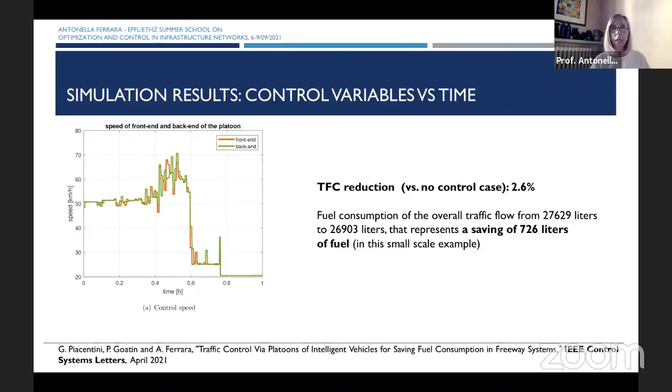Well, I'm concluding. I skip here, just a mention to the fact that if you are interested, we also published a MetaNet version of the model for incorporating platoons of connected and automated vehicles. I've just prepared a slide on this that you may check if you're interested. Even in the case of MetaNet, we can obtain good results with the control.

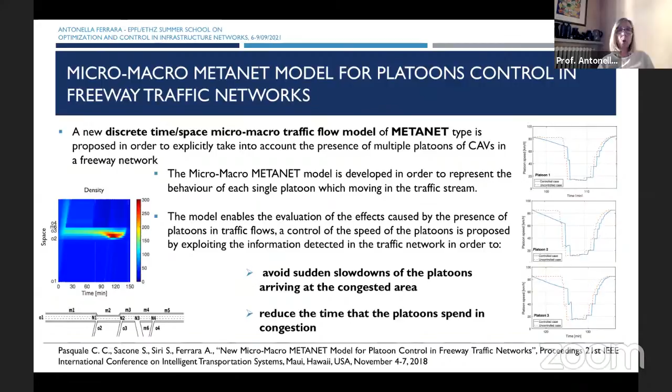Well, of course, the model is more complex in the sense that we have both the dynamics of the density and of the velocity explicitly reported in the model, included in the model. But again, the model is a new version of the MetaNet in the sense that, as written in the title, it's a micro-macro version, so multi-scale MetaNet model, let's call it like that.

And this is all, these are my conclusions. In this lecture we have seen something related to the classical approaches with some elements, in my opinion, of originality, in the sense the event-triggered approach, the cluster-based approaches can be interesting for people who like to enter the field of traffic control.

Then we have moved the attention to multi-scale models, in particular those capturing the presence of connected and automated vehicles in the traffic system itself. I've mentioned the CTM with connected and automated vehicles, the so-called coupled PDE-ODE models, and I've also briefly mentioned the MetaNet with connected and automated vehicles.

We have seen with some examples, of course you may find other examples in the paper, that the use of connected and automated vehicles may be effective. Let me say that I define the effect of connected and automated vehicles as promising, in the sense that, of course, we still have to study, we still have to learn how to make the most of this possible way to control the traffic system.

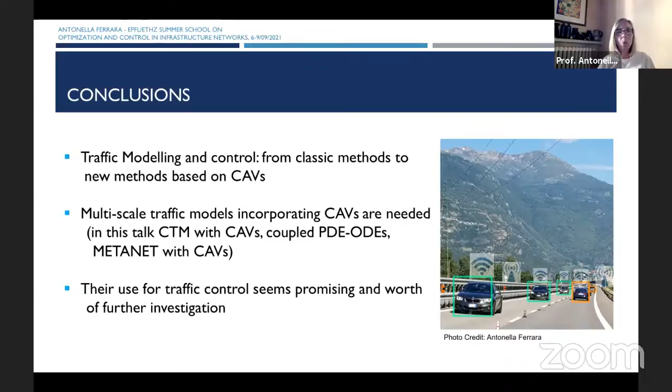And I conclude by showing you some papers that can be useful, some references that I've used in particular to prepare this talk. There is a book that probably you have already seen, which I've written together with Simona Sacone and Silvia Siri recently, a couple of years ago, so 'Freeway Traffic Modeling and Control.' The classical part is completely included in the book.

Then there are some other papers. This one is more related to sustainability, so I remember the comments at the beginning of the lecture, and it may be useful if you are working with sustainable mobility. This is the paper dealing with the variable length cell transmission model that I mentioned before, very convenient for traffic control. There are other papers you see here that may be useful for you, which I've used in particular for today's presentation.

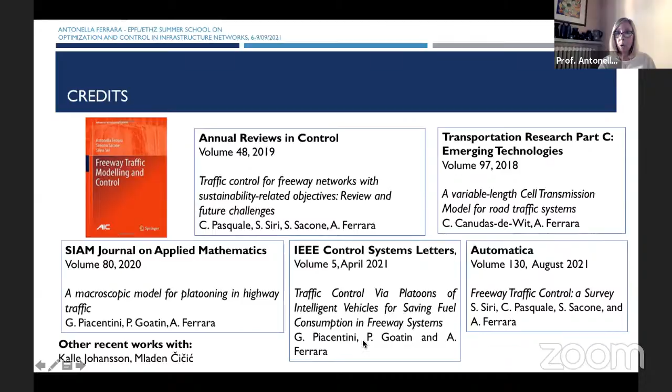I want to mention this last paper, which was very recently published. It's already available online, and it's a survey paper, in which, in particular, the more classical aspects that I mentioned in this talk, but also many others, are reviewed. And there are many references.

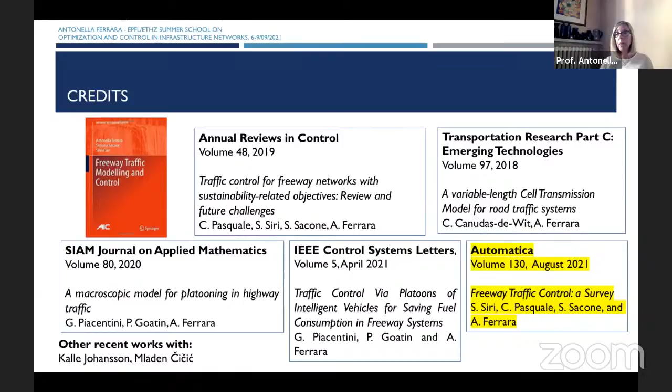So I think that for those of you who may decide to work, or some of you who are already working in traffic control, this can be a useful reference. You find a kind of survey of the literature, some comments on the major trends that have been visible and relevant in the last decade.